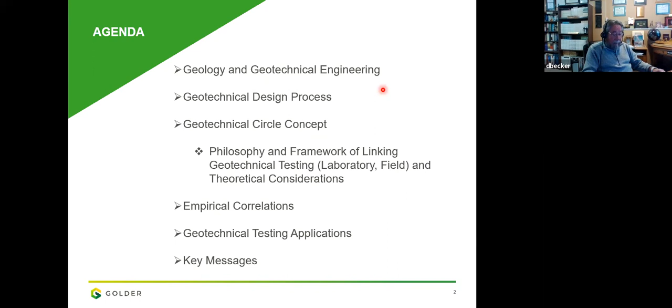So I like this quote from Karl Terzaghi: it took me 2 years of strenuous work to discover that geological information must be supplemented by numerical data, which can only be obtained by physical tests carried out in the laboratory. This was one of the first statements about recognizing the importance of testing. He had specifically mentioned laboratory, but I think it equally fits in situ and field performance testing.

And there's this extreme importance of linkage between geotechnical engineering and understanding geology. Karl Terzaghi and other geotechnical engineering pioneers always worked in the background of geology. And it's very important to have that linkage of understanding geology and the insight that it provides to us geotechnical engineers with regards to ground behavior.

R.F. Legget, in his book Geology and Engineering, discusses the important interrelationships between geology and geotechnical engineering. If you haven't read this book, you should do so. It's interesting, although given his writing style, some of the sentence structures are a bit long and it's difficult to understand. But anyway, that's just my private critique of an otherwise excellent book.

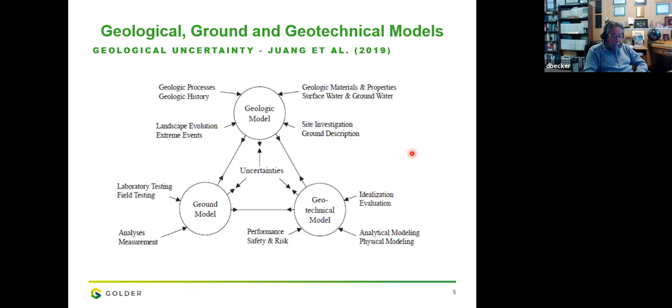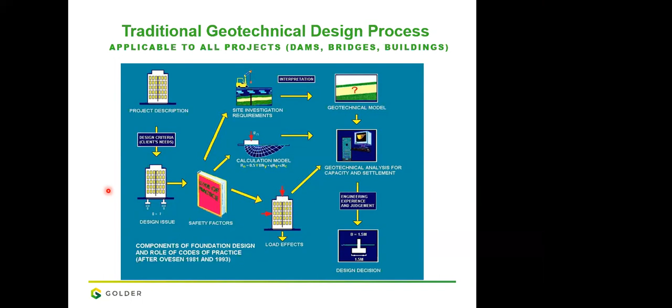Dennis, we're not seeing your slides, or at least I'm not seeing your slides, so I'm not sure if everybody else is doing it. We see the video is on you. I think it's just you, Dr. Martin. Maybe you need 2 screens. Maybe you don't see the right screen. Sorry to interrupt, Dennis, go. Oh, not at all. Hopefully, yeah, no one wants to look just at me through this entire presentation, but I understand most people are seeing the slides, correct? Yes, yeah, it seems so.

Okay, good. So as I was saying, this applies to buildings, but it's also applicable to any project, dams, bridges, or what have you. You start off with whatever the project is and the client's needs, etc. For this case, it's to design a suitable foundation. Usually design is controlled by a code or manual guidelines, which will have some recommendations on testing as well. And it will feed into the load effects on this building.

And again, testing played a big part to come up with what are those load effects. It feeds into a calculation model, and again testing was a key part of that. And testing is very obvious in this upper part where you're doing the site investigation work, drilling boreholes or doing CPTs, and then doing some interpretation, which then brings you into the geotechnical model. So the layers of ground and engineering properties, and that feeds into an analysis assessment, as does this calculation model and load effects.

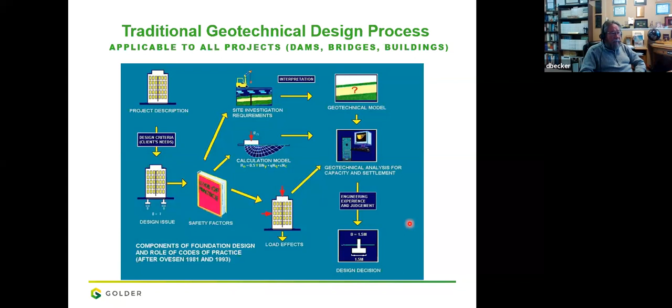So there's some key considerations in support of any design approach, and it's applicable to all projects. Again, my first point is it's important to understand the geological setting. And this, I think, can be, or a lot of times is more important than the method of analyses and calculations. What you should take away from this presentation is don't forget about geology.

It's very important. The other aspect as geotechnical engineers, we have to make the most of limited site investigation data and honor all the data. What I mean by that is that you can't ignore something because it's convenient to do so. If you interrogate that result and you find the test was conducted properly, there's no reason to discount it. So you have to keep that data point and make sure you assess how it might affect your analyses and design.

I always tell my younger colleagues that you need to spend time to develop an appropriate geotechnical model. When I was a young engineer, I just wanted to rush into the analyses, and you really shouldn't do that. You need to spend the time to make sure you got the facts right in terms of developing your borehole record and things like that, because at the end of the day, if something goes wrong, you will be judged. A geotechnical engineering firm will be judged by how representative and correct their borehole records are.

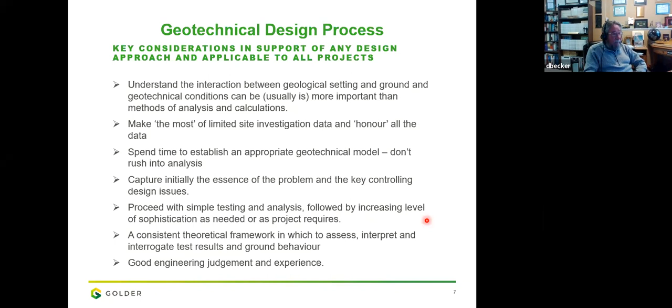And it's important to have a consistent theoretical framework in which to assess and interpret your test results and the ground behavior. I've always used critical state soil mechanics and yield envelope concepts and those types of things, but that's not the only framework to deal with, but it's important that you do have a theoretical framework to assess testing results and ground behavior. And then the element of good engineering judgment and experience, because as you know, they say good judgment is usually the result of experience, and experience is frequently the result of bad judgment.

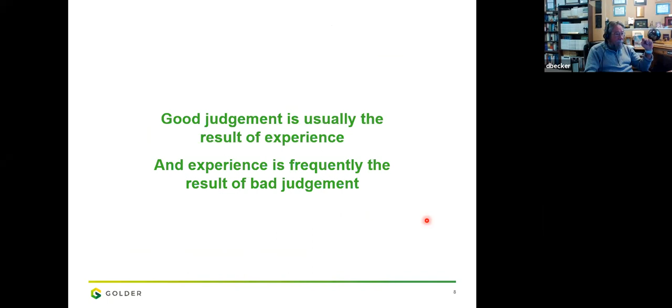Referring back to Legget, he pointed out that there's basically three primary branches in geotechnical engineering: theory and theoretical approaches, site investigation to get quality samples to try to obtain the ever elusive undisturbed samples—difficult to truly achieve because even the method of drilling a borehole or pushing a cone always has some disturbance effect—and then the third part is laboratory testing.

In situ testing, whether it's CPTs, dilatometer, or pressure meter, was developed and occasionally used starting in the 1980s, just as I was starting my practice, but routine use really only started around the mid 1990s. Since then, I think there was a sense that in situ testing rules, that you should rely on in situ testing.

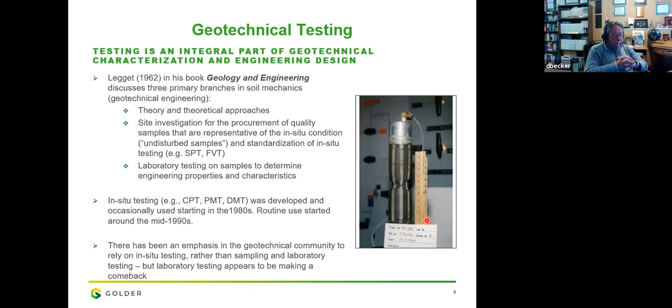But over the last few years, my sense is that the need to obtain samples and do laboratory testing is making a comeback. I think the industry should never get to a point where you never obtain samples, you never get your hands dirty by looking at them. It's a very key part of the process.

I refer to this as the geotechnical circle concept, and it fits into what Legget was talking about, where you have your theoretical aspects—constitutive laws, stress field, yield surfaces and the like—which fits into what type of laboratory testing you would do, which then fits into in situ testing. And the results from in situ testing also feed back into what you would do on laboratory testing.

So it's like layers of an onion, where you start at the outer part understanding your project client needs. You develop a site characterization program, move into testing conditions, and that feeds into site assessment, as does your field and in situ testing. This geotechnical circle concept is a very useful aspect to keep in mind.

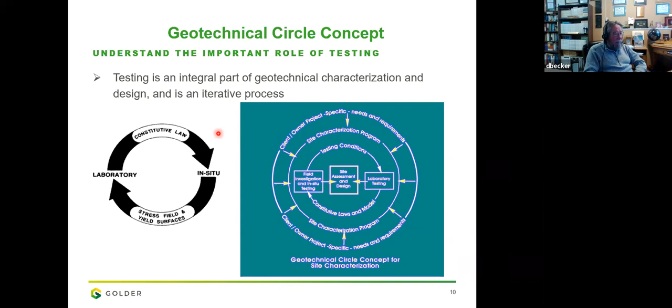The whole process is very iterative, as shown by this slide with this flow chart. We've already talked about understanding project needs and those types of things. You review existing site information, develop a conceptual model, design a testing program, and then get into the iterative part.

Of where you collect the data, examine, interrogate it, and does it fit within your theoretical framework? If all the results are consistent in that, great, you're done, and you can go in and report your findings and establish your geotechnical model.

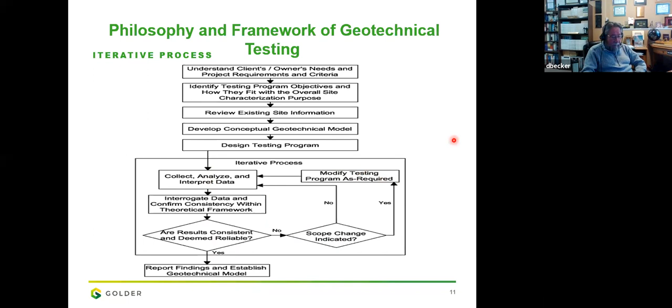The answer to that is no. You may, and there's no scope change—you go back up and go through that loop until you finally can say yes. But if you've come across something that might be different, there could be a scope change. Then you go in, modify your testing, and jump back into the process and start over—well, not start over, but just go through the process.

So some of my thoughts on what forms a meaningful value-added test program. First, you have to understand the limitations and advantages of your various tests, whether it's in situ, laboratory, or field performance. It's like a toolbox with different sets of tools, and some tools are better suited for a particular problem than others.

You need to have thoughtful and adequate planning that is based on a good theoretical framework, which you would use to interpret and interrogate the test results. How much you get out of a test program really depends on how much care and thought you put into designing the test program. If you haven't given it a lot of thought, chances are what you get out of it is commensurate with not giving it a lot of thought.

So I stress this particular point—you really have to give it careful thought in terms of what it is you need to obtain and what's the best way of doing it.

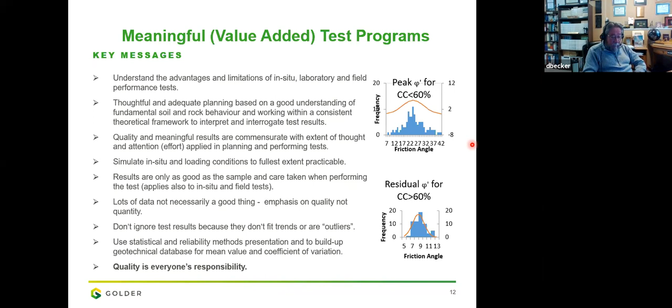The next few slides will talk about examples of testing that supported the development of theoretical considerations and applications in practice.

The first one is state parameter, developed by Ken Been and Mike Jefferies, and that was developed in Calgary in the early 1980s from the need associated with the Beaufort Sea.

And the concept is quite simple. The details are, you have to be rigorous in the details, but basically you can assess sand behavior if you know the critical or steady state line, which is a condition of testing that is at constant volume, constant void ratio, constant velocity, those types of things. This is void ratio plotted against log mean stress. So you may have a point A that plots above the steady state line, and the distance that A is from that steady state line, that is the state parameter.

And if you're in this region, it's a positive state parameter, or it indicates contractive soil behavior. So you may have an effective stress path that rises to a peak and then strain weakens, and you typically would have volume excess positive pore pressures and volume decreases. So this is contractive material, or potentially liquefiable.

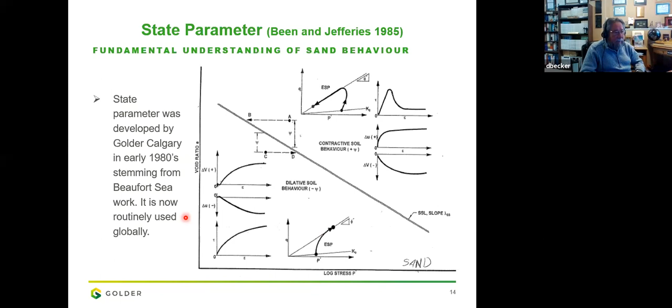So testing formed a very significant part linked with critical state soil mechanics to come up with this fundamental concept, which is very widely used in industry today.

Another example, this time with clay behavior, is the concept of a yield envelope, which is this big, thick black line. This stress path, or vertical axis, is your axial stress minus your radial stress, because sometimes your radial or horizontal stresses could be greater, which puts you into a negative space using these symbols. If you were to put this into sigma 1 and sigma 3 principal stresses, you would only have the upper part of this curve. But I think it's instructive to have it in terms of horizontal, radial, and axial stresses.

So you can do different types of testing, strain controlled or stress controlled. You can do some oedometer work, or a stress path, to define your yield envelope. Typically, the part that intersects where K0 is your pre-consolidation pressure, and the top part of your yield envelope, is typically around 0.2 to 0.25 of that pre-consolidation pressure. We'll come to that aspect in subsequent slides.

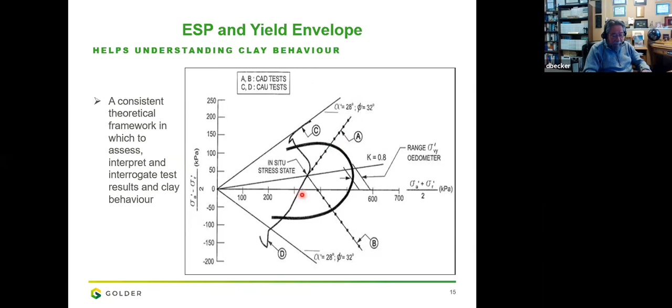And in order to have strength gain, you have to have loading that pushes you outside of the yield envelope, or you have to exceed the pre-consolidation pressure. And then once you're out in this area, it's normally consolidated, a higher strain condition with lower coefficient of consolidation. So this concept is very useful to understand clay behavior.

Or you can also put this in a Shansep approach, where this stress ratio is a function of your normally consolidated stress ratio, which is your 0.22 or 0.25 number, times over-consolidation ratio.

Testing has shown that if you're doing triaxial compression, the ratio of SU upon PC is about 0.3. Direct simple shear is around 0.2 to 0.25, and extension is lower. So as a typical average mobilized strength, your direct simple shear value is not bad.

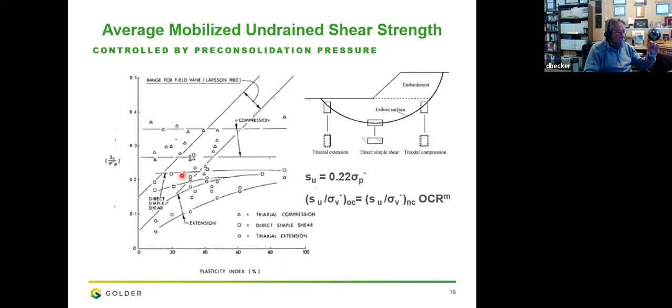The next few slides talk about correlations. Geotechnical engineering has always relied on empirical correlations. They're very useful, but you have to understand how and why they were derived. I think the most valid empirical correlations are those that capture the essence of behavior or first order controlling effects. You should always have a theoretical or physical understanding of what properties you think can be expected to be related.

It's important, in my opinion, to correlate undrained response in a test that has undrained parameters, or the corollary of that, drained response in a test to drained parameters. So if you're pushing a cone through a clay, it's undrained, so you should be going to undrained shear strength. If the cone's response is drained, such as in sand, then you would be going to effective stress or drained parameters.

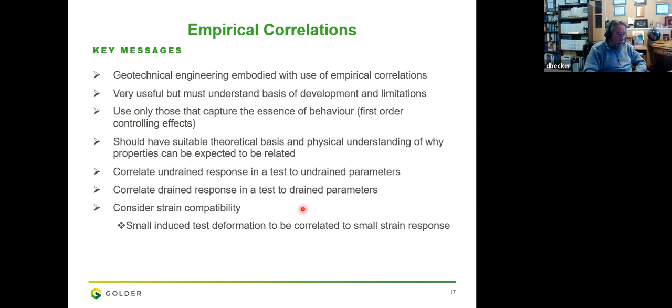And it's important to consider strain compatibility. If you're doing an in situ test such as a dilatometer where there's very small strain, that would be useful for a K0 type of thing, but it wouldn't be all that useful for large strain behavior.

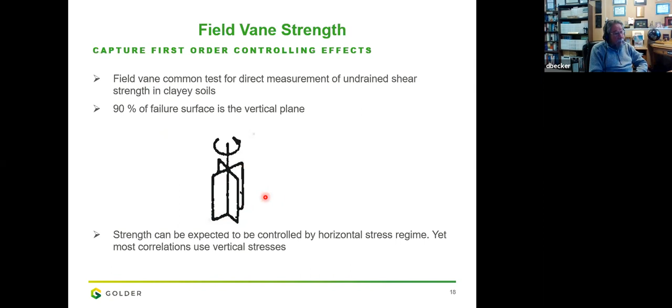As an example of capturing first order effects on the field vane strength, which is a very common test, when you look at the vane, 90% of the failure surface is along the vertical plane. So you would expect that horizontal stresses would help control the strength that you measure from a field vane, but yet most correlations are done with vertical effective stress.

This slide compares whether it's vertical effective stress or horizontal stress, using sites where I had pressure meter data or other tests where I could measure K naught. If you plot SU vane against vertical stress against OCR, you get this type of correlation, similar to the Shansep approach, the equation I mentioned earlier.

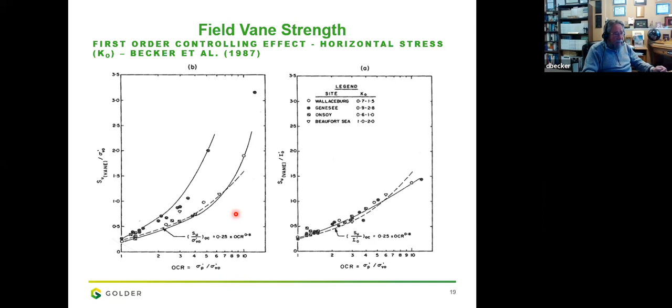But if you take that exact same database and now normalize it with regard to K naught or horizontal stress, that same database collapses down to a very narrow band. To me, this indicates that you are capturing first order controlling effects on the field vane strength, and that horizontal stresses are important to consider when interpreting field vane strengths.

That's reinforced by this slide, which again plots SU of the vane against pre-consolidation pressure against plasticity index. I mentioned earlier about the Bjerrum correction factor for correcting high plasticity clays, and sometimes that correction factor or adjustment factor could be as high as 0.5.

Again, the intent is to bring measured values down into more line with the direct simple shear mode. And again, if you take that same database and plot it in terms of horizontal yield stress instead of vertical yield stress or pre-consolidation pressure, it collapses down into quite a narrow scatter from a soil mechanics point of view, which again, in my opinion, demonstrates that you've captured some of the controlling effects of the test results. For a field vane test, that's horizontal stresses.

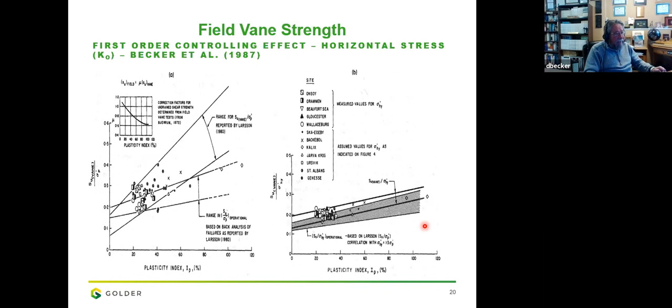The earlier slide about yield envelopes talked about the importance of OCR and pre-consolidation pressure. They're very important, and there are many correlations based on these factors. Therefore, it's important that you have a reliable and unambiguous, I call it certain, assessment of pre-consolidation pressure. However, many soils have rounded E-log P curves, and everyone's familiar with the void ratio versus vertical effective stress on a log plot.

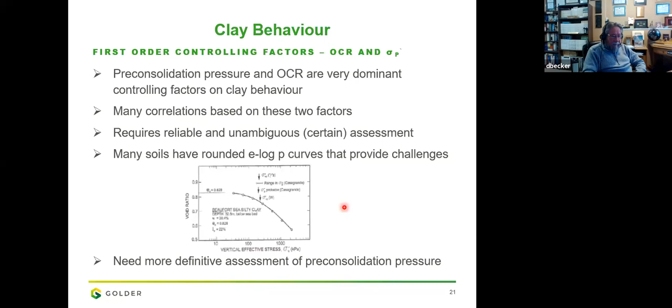If you're doing the Casagrande technique, it could be somewhat ambiguous in terms of what is the pre-consolidation pressure, keeping in mind that this is on a log stress scale. So if you're using a magic marker instead of a 0.5 mechanical pencil to draw your line, it has a big effect on the interpretation. So we need a more definitive assessment of pre-consolidation pressure, which led into some work that I did in the early 80s, again on the Beaufort Sea work, where there was the need to have a better definition of pre-consolidation pressure.

It wasn't that I woke up one morning and said I'm going to do something clever today. Rather, I was in the lab, and in those days you ran your own testing - I did all my oedometer tests, triaxial testing and that. I was reading papers on people determining yield from triaxial tests in 2-3 dimensions, and thought, if these people can do it in 2-3 dimensions, I might stand a chance dealing with it in 1 dimension. So I applied the same principle of strain energy, which is just the area underneath your stress strain curve.

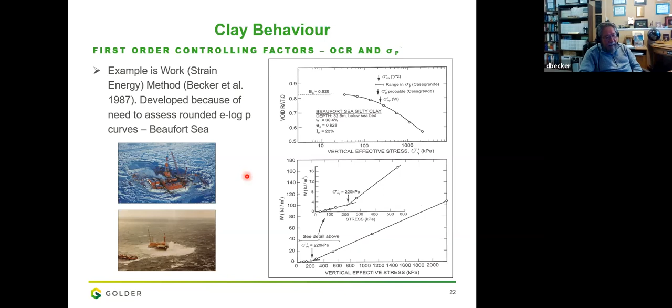This same data in terms of strain energy, or work done against vertical effective stress, on an arithmetic scale plots like that, and I'd say there's little ambiguity of what the pre-consolidation pressure or vertical yield stress would be. So if you haven't used this approach, I'd suggest you try it. I was very pleased when people like Professor Charles Ladd at MIT and others at NGI said that they

now routinely use this technique to determine pre-consolidation pressure. The other thought I had on days when I guess I wasn't busy enough - if we look at, normally we have our ground surface, we take our Shelby tube and take it to the lab, we trim it. Normally we trim what I call a horizontally trimmed specimen, and that should give you vertical stress, pre-consolidation, vertical yield stress. And I said, well, if I trim it vertically, then I should be measuring horizontal stresses.

To compare that, I had the luxury of having pressure meter data, high quality pressure meter data, to interpret horizontal yield stress. This is a plot of excess pore pressure versus total cell pressure, and where you start seeing an increase in pore pressure is the yield. You can see that from the stress strain curve here, and this is reasonable agreement. The circles are from the oedometers.

This is from the pressure meter tests, so they have the same sort of trends, which is useful because if you want to get an indication of horizontal stresses, you can do it by simply vertically trimming tests. Here's my one outlier that I haven't taken out because I couldn't ignore it - I haven't explained why that happened, but I didn't throw it away.

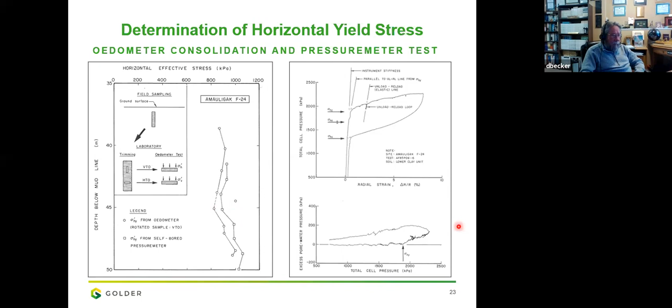What is known about CPTs is they're frequently used to get pre-consolidation pressure, because if you have pre-consolidation pressure, you can go into undrained shear strength, such as 0.22 times the pre-consolidation pressure. There's been a lot of work done over the years showing that pre-consolidation pressure is a function of your tip resistance minus the total vertical stress, and this factor F varies from 0.28 to 0.33. There's lots of papers that reference this particular number.

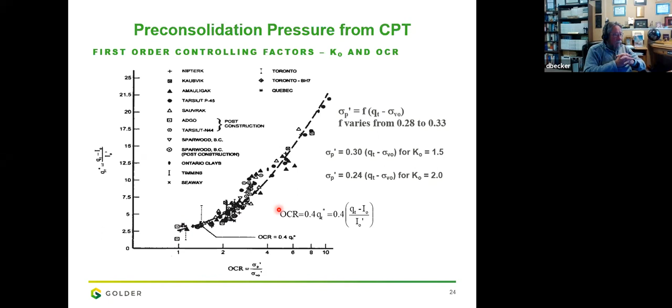If you plotted this up in terms of vertical effective stress, you'd have a very similar trend, but perhaps a bit more scatter. Again, horizontal stress is a key part of controlling ground behavior, so you should try to consider that when you're assessing engineering properties.

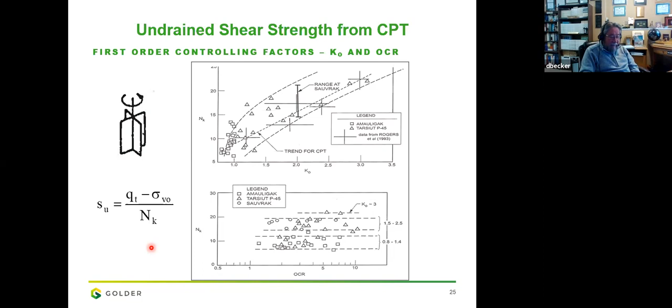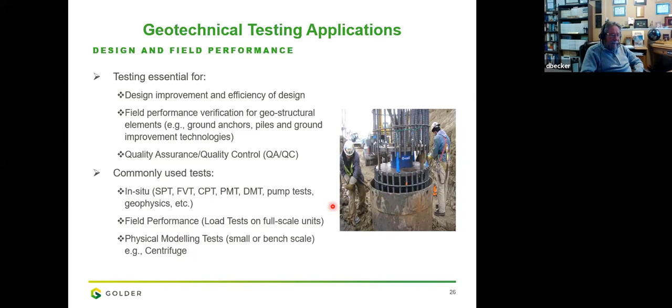The previous slide here is an O-cell test for testing ultimate skin friction and end bearing on reinforced concrete piles. It's an excellent test.

Full-scale field performance tests provide an understanding of the geostructural element in the system. You can get design efficiencies because you can use higher geotechnical resistance factors or lower factors of safety. But if you're going to take the time to set up these tests, you should take them to failure so you obtain ultimate values of geotechnical parameters. This allows you to refine your design and provides the highest degree of certainty.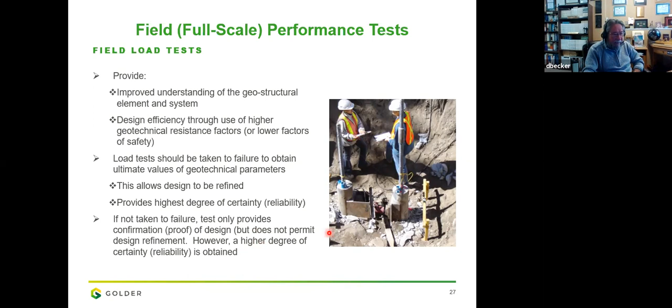If you don't take it to failure, you can't really refine your design. It's only a confirmation or proof that you have at least that particular ultimate value of skin friction or lateral pile resistance, as shown by this test, which is a lateral load test on piles.

However, I have to point out, a lot of my clients think, well, let's do a test because you're going to get higher numbers, and that often happens. However, there have been cases where you do the test and actually get lower numbers than what you first thought. Once you do the test, you're stuck with the number. You can't say, oh, it's lower, I'm going to go back to what I had before. So doing more testing could be a bit of a double-edged sword, but most of the time it's to advantage.

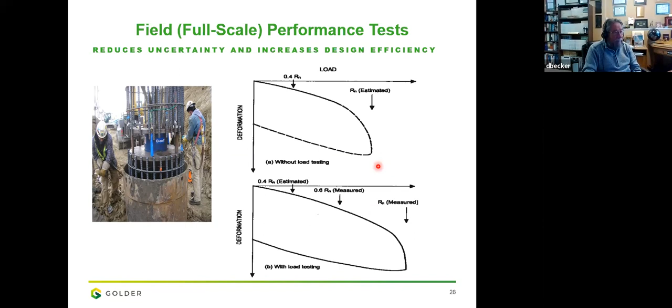As I mentioned, you can have this increase from 0.4 to 0.6. That's a whopping 50%, you might say, but it really doesn't translate into 50% cost savings because there are other things such as redundancy, pile spacing, and other factors that need to be taken into account.

Field performance tests are very expensive. A full-scale load test could be on the order of $100,000 for one particular test, but they can provide significant cost benefits. So if you're explaining this to a client or owner, use the word investment—that he's investing his money, it's not a cost. Clients and owners are sophisticated; they understand investments.

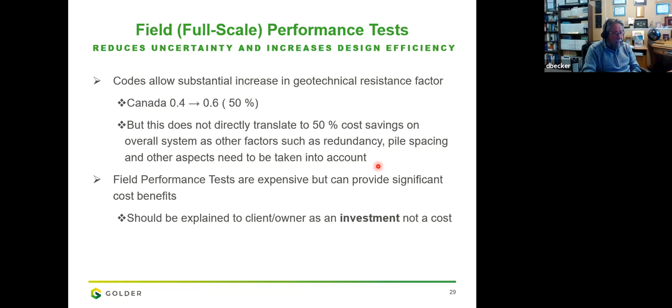Talk briefly about physical modeling tests. They're needed because a lot of times the behavior of natural soils and rocks is so complex that it can't be captured by analytical and numerical methods alone. It helps gain improved physical understanding of failure mechanisms, and it assists in the calibration of analytical and numerical methods.

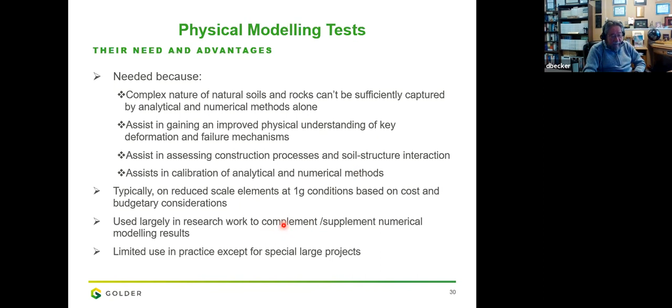However, small-scale physical tests can usually be done only at one gravity, and therefore you don't always get to model the actual stress conditions you have in the ground. There's limited use of physical modeling tests in practice unless you have some very large and special projects.

Examples of physical modeling tests are single and pile group behavior, static and cyclic loading conditions, and frost heave forces on pipelines. This is a setup from our cold room in the Calgary office, where we have programs to measure the stresses induced on a pipe due to frost heaving. We've also done work with iceberg scour studies, flume testing for tailings deposition, overtopping of dams, fuse plug design in dams, and centrifuge testing.

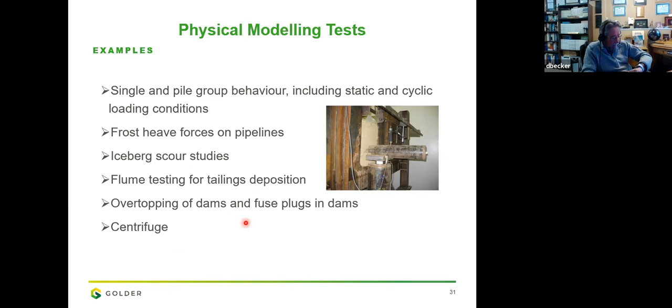So the centrifuge has increased significantly over the past 25 years. I believe U of A's Rick Chalaturnik has a centrifuge now at U of A, and I'm sure there's a lot of excellent work coming out of that. The advantage is that you can produce more realistic, higher stress fields like you'd have in the field, whereas a small scale static test only allows you to test under 1 gravity, not 4 times gravity or whatever the case may be. It helps shorten the time when modeling problems with advective flow and those types of things. It's used mainly as a research tool, but it has had some limited use in practice.

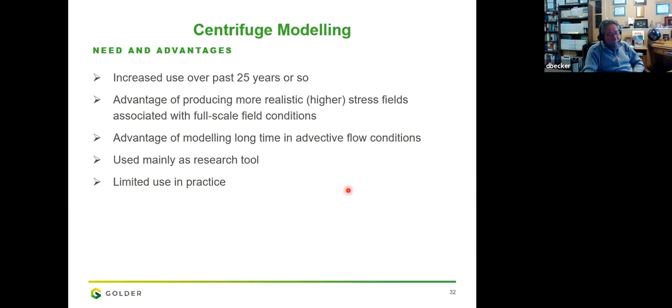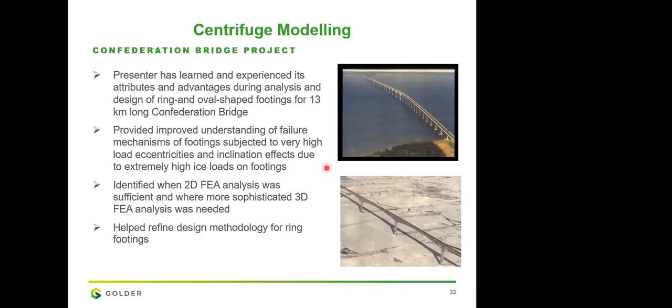Kevin, just a bit of a time check - I see it's ten to one. I was going to talk briefly about using the centrifuge at the Confederation Bridge, but if you want to set some time aside for questions, I'm okay with that, and I'd just skip to some of my key messages. Yeah, I think you can go ahead and jump into the centrifuge model if you feel like it. Okay, but this is at one, right? People have to head off and such, I'm just cognizant of the time. We can go a little later if you have the time, it depends on your schedule - you're the guest of honor. Oh okay, well you should never invite me to speak longer. But I'm more concerned about others. So okay, I'll just press ahead, and again my apologies for this being a bit longer than I thought it would be.

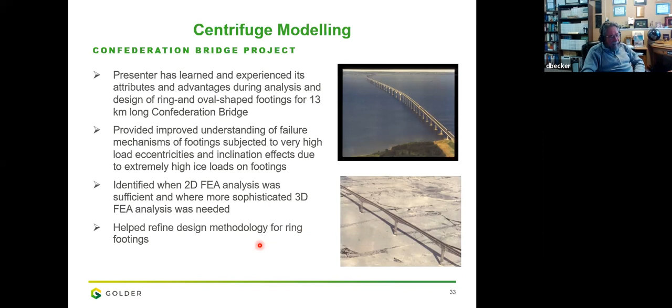But I did want to share this experience on the Confederation Bridge. I have to admit I was a bit of a skeptic going into it, but I've experienced that it has many attributes and is very positive in terms of complementing what one would normally do in a design process. On the Confederation Bridge, where we had ring and oval shaped footings, it certainly helped provide an improved understanding of the failure mechanisms of these footings, which were subjected to very high load eccentricities and inclination effects due to the ice loading. You can see at the bottom, it's winter, and you can actually see the ice sheet flowing and leaving a bit of a wake behind the pier. There were very substantial horizontal loads applied high above the base of the footing. The centrifuge modeling was also very useful in helping us understand when we could do more simple analyses, such as 2D, and where we needed more sophisticated 3D analysis - going back to my comment earlier, start off simple and only get more sophisticated as needed.

This sketch shows the configuration of a foundation unit. It's a hollow type of structure, a ring, and as I said, there are very high ice loads which have a moment associated with them, so there's quite the concern of this structure tipping over as much as sliding.

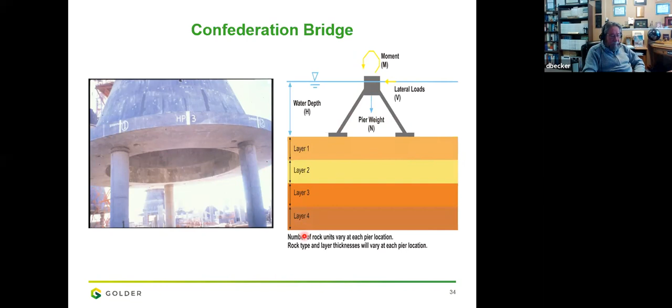We started out - in reality we have circular ring footings and oval rings. When we have these horizontal loads, there's a consideration where the red here is actually your contact, and the lighter area is where you would have liftoff due to that horizontal load and moment. That was first handled with simple models of equivalent square or rectangular footings.

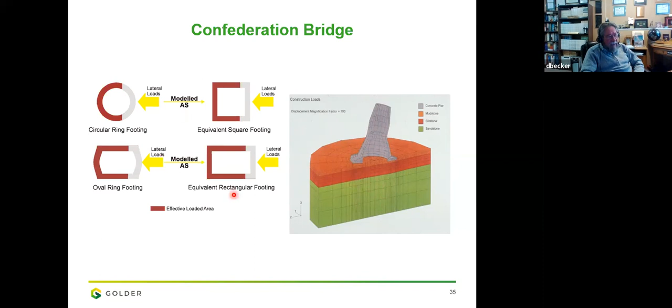And we did centrifuge testing. In the end, we actually did some 3D finite element analyses as shown in this sketch here, now with the ice load going in the other direction. You can see the model was showing this sort of tilt of the structure, not full contact everywhere along the base of the foundation. So C-CORE did some excellent centrifuge testing for us on different models, and they came up with quite an ingenious method of applying lateral loads to simulate the ice loading and those types of things.

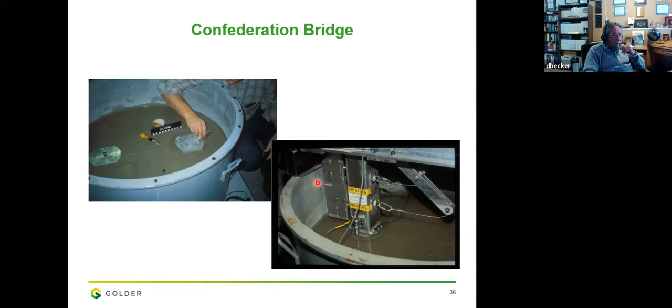And then the results of this came out where it showed we actually did have concentrated loading, and these spaghetti markers truly were spaghetti. The pieces of spaghetti were inserted into the ground model before it set up, and it was a very useful tool to identify what deformations were happening and what failure mode may be associated with, to take into your analytical and numerical modeling. So I became a believer with the work on the centrifuge, but it took a large project from a practice point of view.

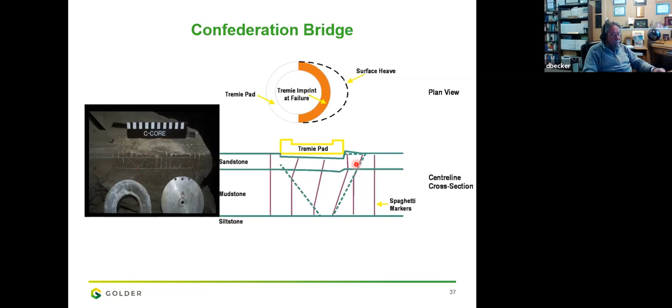So to wrap up, I have a couple of key messages. I think you already understand the first two bullets, I've talked about those already, about making sure you don't forget about geology. You have to understand the geological depositional histories and other aspects of fundamental ground behavior in your analyses.

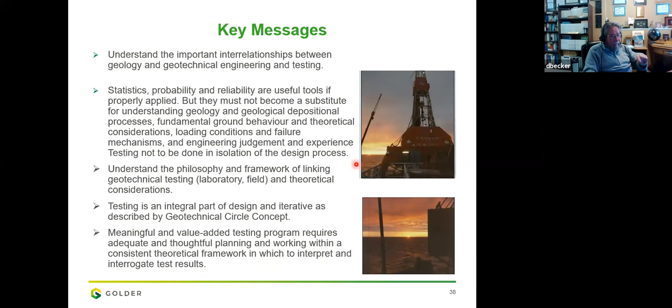The geotechnical circle concept is very useful, and it demonstrates that testing is an integral part of design. It could be iterative, and it fits into this philosophy of linking testing with theoretical considerations. It's useful, if not mandatory, to have a consistent theoretical framework that you use to interpret and interrogate your test results. You can't just do a test and say, let's wait and see what the test says. You really have to set up the test with a basis, and then see how your test result fits with your hypothesis.

Again, this thing of you get out of a test program the thought and care that you put into setting up the test program.

When you're developing correlations, it's important to make sure that your correlation captures first order controlling behavior. You can take anything and plot it against something else and see what comes out of it, but it's always more meaningful if you think ahead: I have this parameter and this parameter, they should be correlated for this reason, and then plot the results to see what you have.

Again, this concept that if you want to go after undrained parameters, you should base that on undrained tests. It's a bit inconsistent to use a drained test to get undrained behavior, although you will see lots of correlations published in that regard. But if you really want to capture the essence of the correlation, you have to match up undrained testing with undrained parameters.

For field performance testing, whenever you can, you should take those tests to failure so that you truly understand what your ultimate values are. Once you know the ultimate values, whether it's skin friction or end bearing, to use the pile example, then you can refine your design.

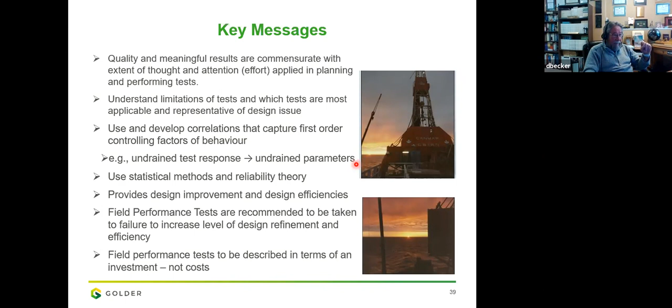And that wraps it up. Again, my apologies for speaking a bit longer than I intended. I should have stayed to a script, but I usually don't work from a script.

So anyway, thank you very much, and for those who may still be around, I'm willing to take questions.